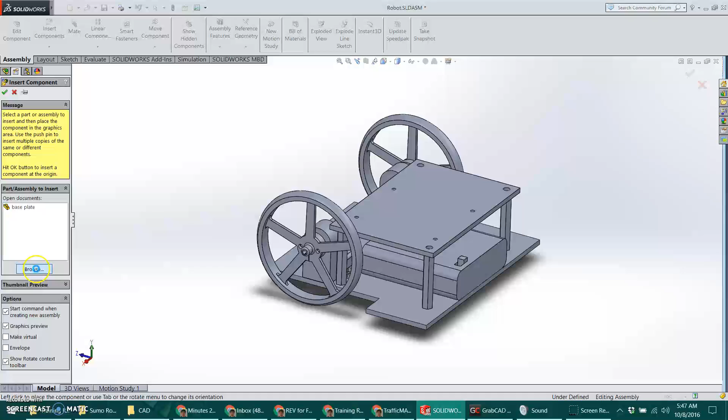Next we'll add the plow to the front of the robot. This of course being the part that's used to push the other robots around.

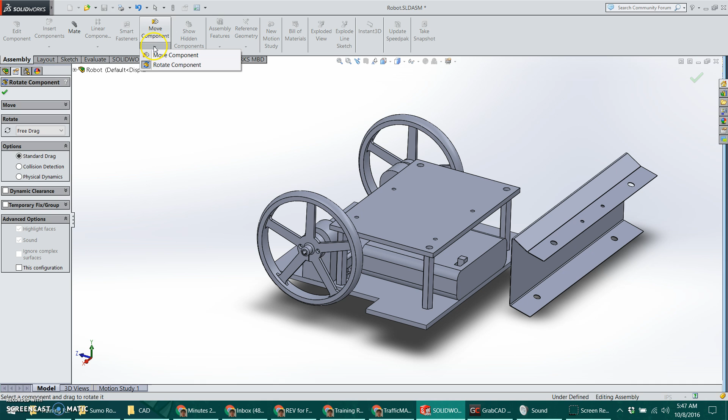As I'm inserting this here, it's actually putting it in sort of upside down from the way it will end up being. As you start putting mates in, it will kind of work itself out. But if you want to start it off close to the right place, you can click the arrow below Move Component, then click Rotate Component. That will allow you to click and drag and spin this around to something a little closer to where it should be.

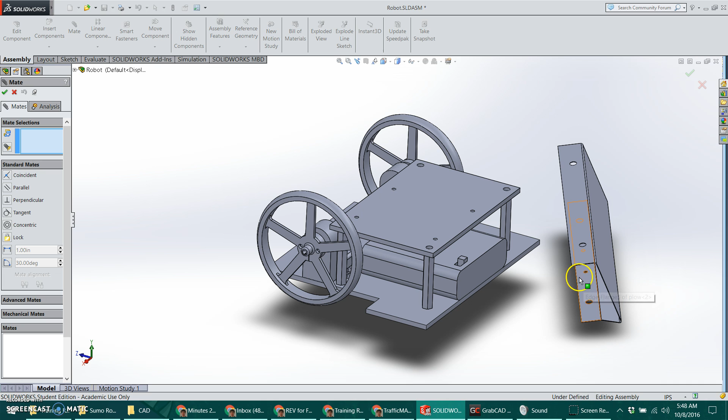So we go back into Mate. The top face of the bottom flange here on Plow will get mated to the bottom of our base plate. And then we'll use these two larger outer holes here to mate to the large outer holes on the base plate.

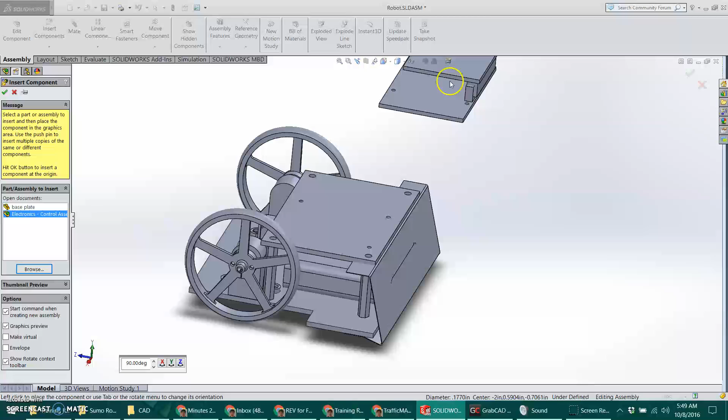So got that in there. Next we can put in the Raspberry Pi and the kind of sensor package that's up top. This gets mounted using the 4 holes in the Raspberry Pi here to the 4 smaller holes in the top plate.

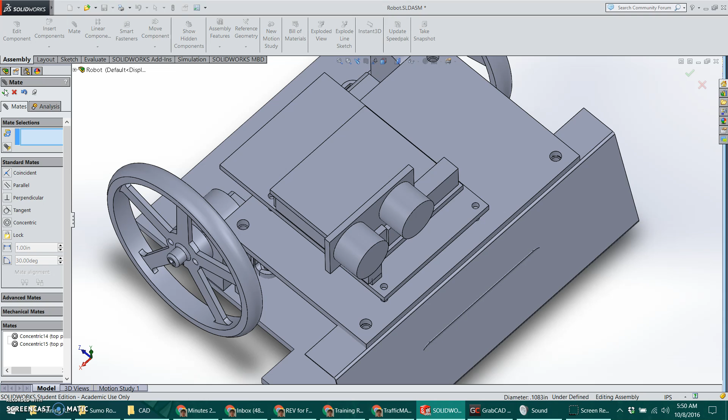So I got a couple holes mated there, but I haven't done the mate to put the 2 faces together. The reason being is I wanted to show you that on this one we're not actually going to have them touching - there's going to be some offset. So when I selected the 2 faces here, instead of leaving it on coincident, we're going to make it a distance mate, leaving a 1/4 inch between the 2 of them. So type 0.25 in here, and that will leave a 1/4 inch gap between those 2 parts.

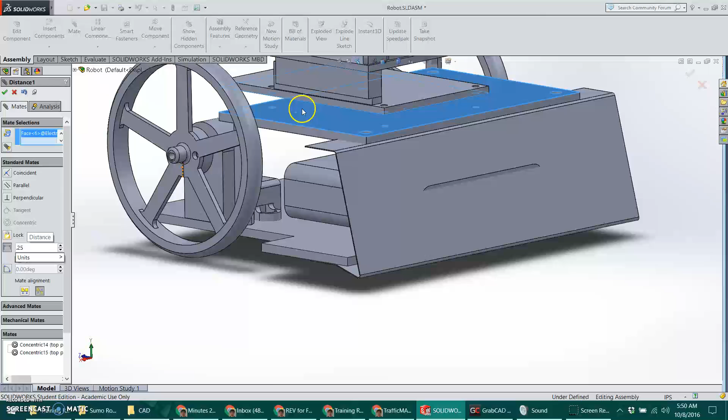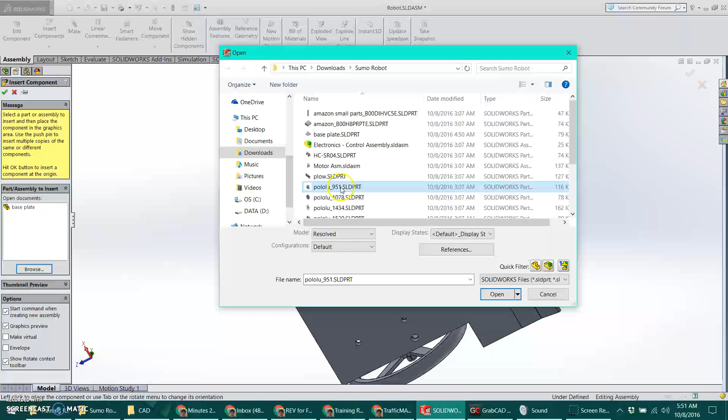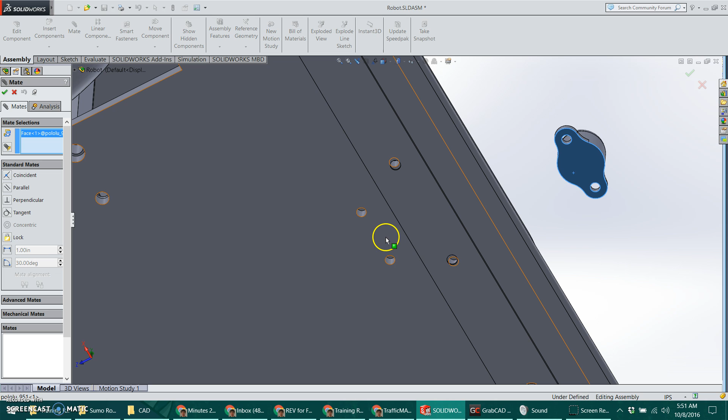Next we can add the couple of parts that attach to the bottom here. The first one of those is the ball caster, which is Pololu 951 - that's part number 951 from an online store called Pololu that sells robotics components. This is going to get attached to this set of small holes on the front, the 2 that are closer together. So first start off by mating the face here of the ball caster to the bottom face of the base plate.

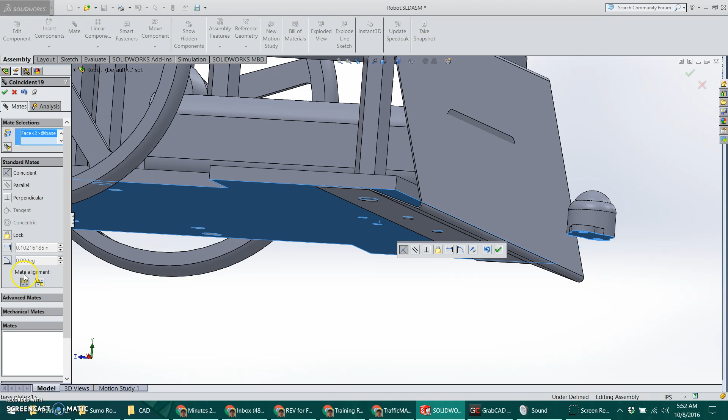But you'll notice that when I do that, it's kind of put them the wrong way around. Instead of being touching, they're kind of in the same place. You can flip them around by clicking the buttons under mate alignment. So I'll click there, it spins around, and now we're all good.

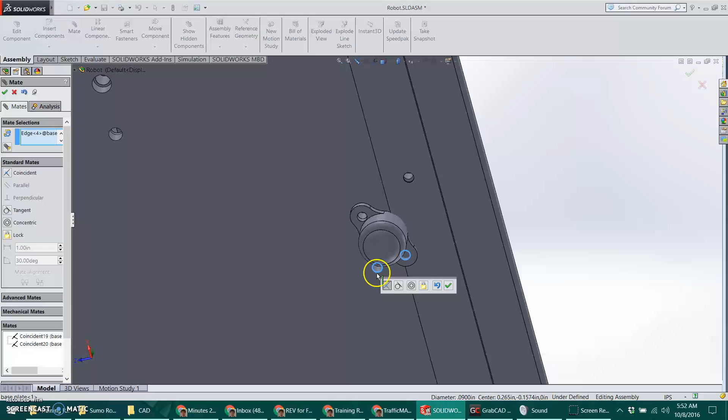So then we do the couple of concentric mates on the holes. Grab this cylindrical part. There you go.

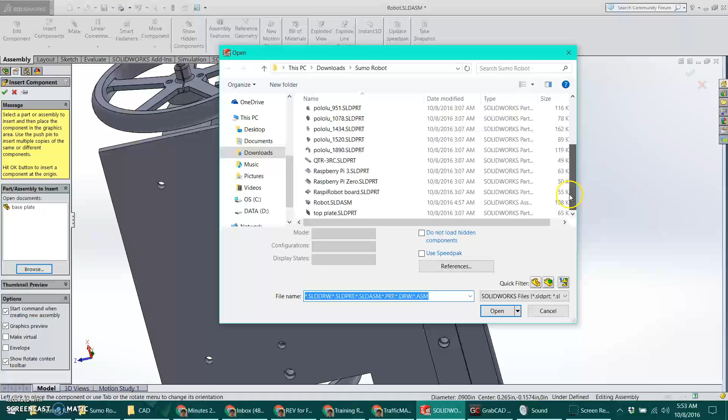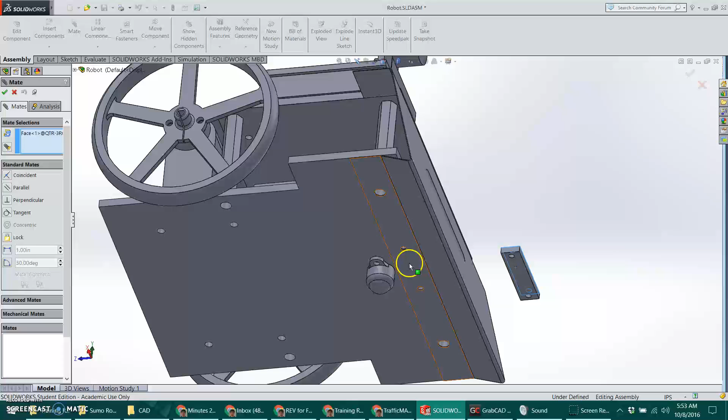And then the next one is the sensor that detects the edge of the arena, and that one is this QTR-3RC. Toss that in there. Getting mate mode, seem to keep forgetting that. So it mates to the bottom side of the flange here on the plow, and then the holes go in like you would expect.

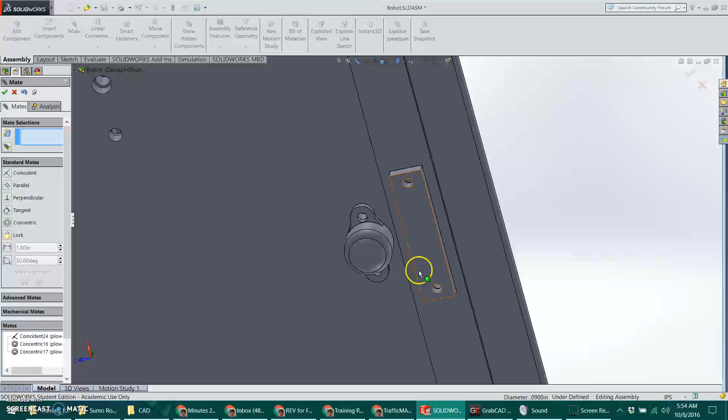It's all in there good. And that's it - there's our completed robot model.

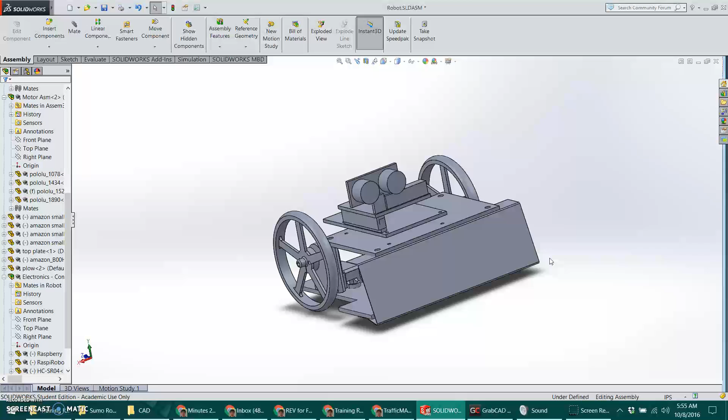So now, if we were designing this part, it'd be a good opportunity to go through and make sure that everything makes sense - make sure that nothing's hitting anything else, nothing's intersecting anything else or overlapping, because that obviously doesn't work in the real world. Obviously a good time to save.

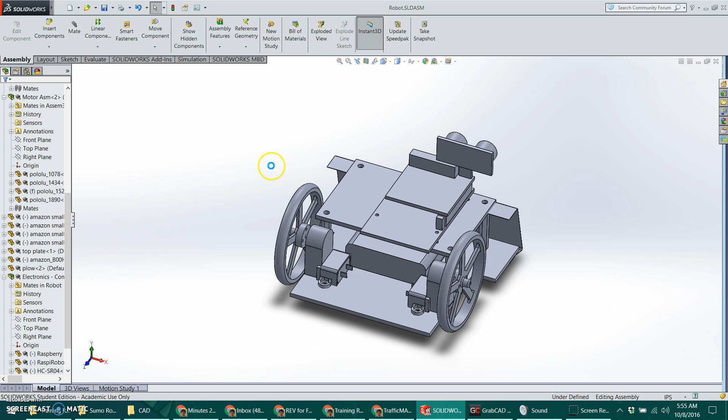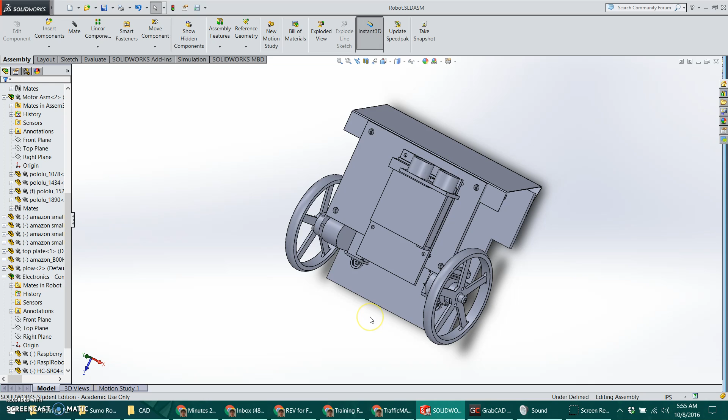One thing that comes to mind as we're looking at this is we can add some kind of small defensive feature to our robot here. Since the robots are going to have this big flat plow on the front, if another robot comes up behind you and sticks their plow right up against the back edge here, it's going to be hard for your robot to get away because you're going to have a flat face on a flat face. So if we were to round the back end here, it would make it not quite so susceptible to that. So let's go ahead and add that change in.

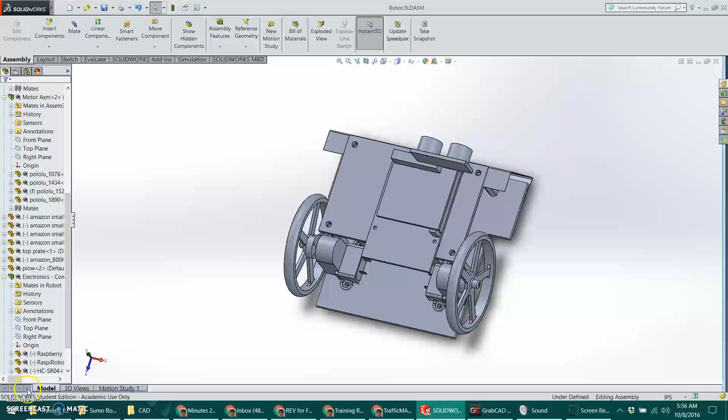So if we go back to our base plate, again, you can switch by window, menu, and then choosing. There's also a keyboard shortcut, Control Tab, that will allow you to switch back and forth very handily.

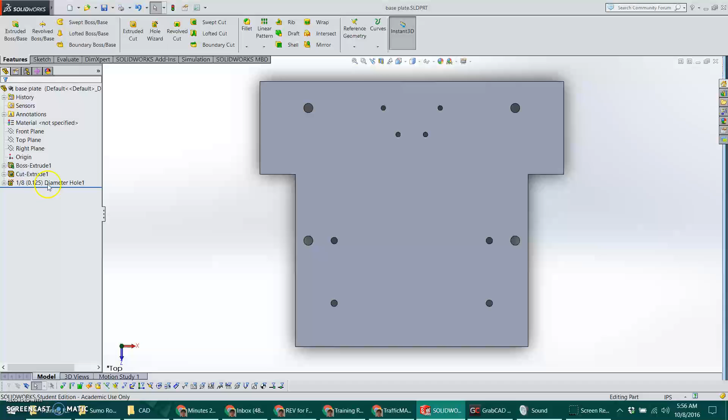So to add our curved back face here, we can go edit our original sketch. If you expand the extruded boss base feature in the browser, you'll find that sketch that we made originally. You can click on it and then click Edit Sketch in the icons that pop up. And now we're back in our original sketch.

To make that kind of curved surface, we're going to come up here and use a circular arc. The default one is called center point arc, but for this one we actually want a 3-point arc. So click the little arrow next to it, choose 3-point arc. The first point will be this bottom left corner, second point will be the bottom right corner. And then you see we can kind of drag that arc around where we want it to be - so we can throw it out there somewhere. And we now have a curve.

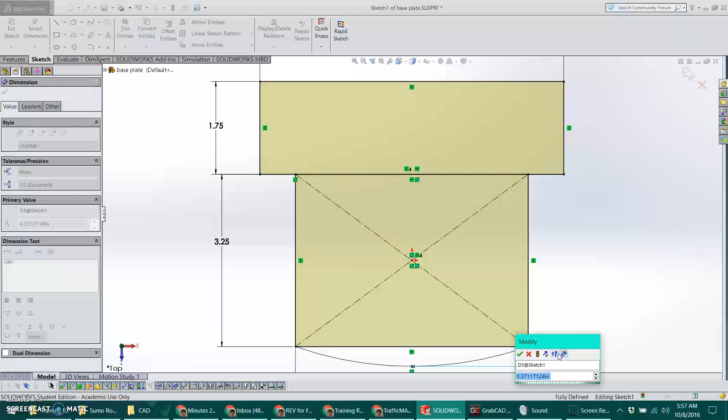But it would be really nice to have a good dimension on this. So a dimension that makes sense is if we click the point tool, that will allow us to drop a point right here on the center point. You see it's got a feature that we can select there. And then that allows us to make a smart dimension between that center point and what used to be the back face of our robot. Something about a 1/4 inch here probably makes sense - let's add that in there. Now we're fully constrained, which is great, fully defined, and we have a nice curved surface there. So we can exit the sketch.

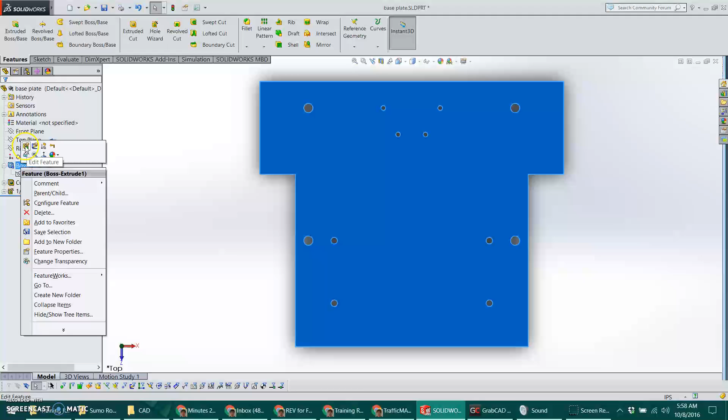And now we need to add that to the part that gets extruded in the boss base. So right-click on your boss extrude feature, and then Edit Feature is this first icon that pops up. Click that, and then we need to add this section down here into the extruded contours. Click the selected contour box here and click on that to add it in, and then click OK.

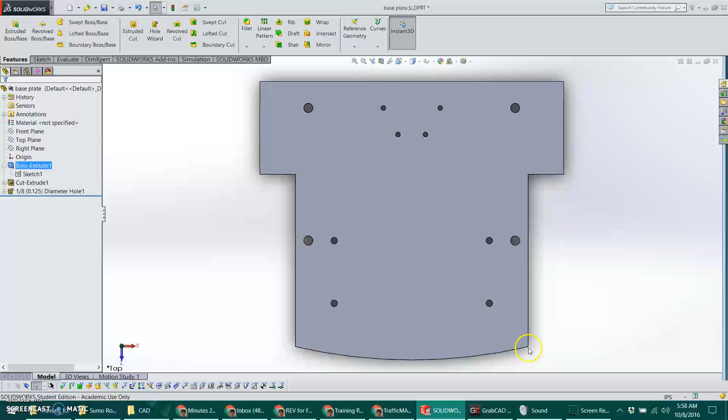We now have that nice curved back surface there. And you'll see that if we switch back to the robot, we have that curved surface now show up in the robot model as well. Save everything to make sure our work is saved, and there we are.